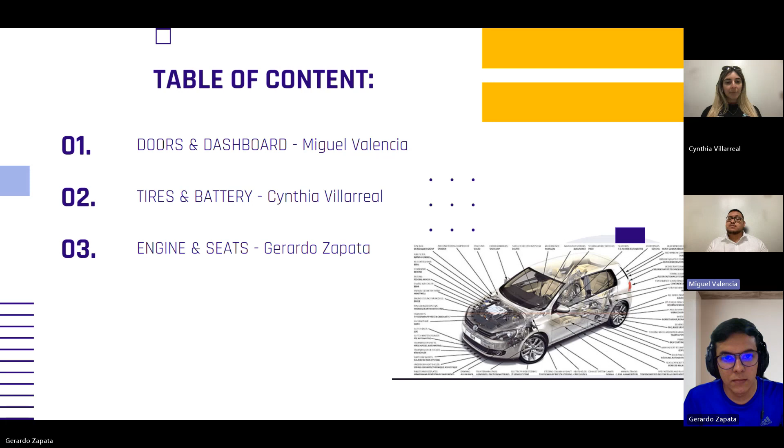So the doors. Car doors are crucial for safe and comfortable passenger access. They provide a secure barrier between the occupants and the outside environment, protecting them from weather, debris, and potential accidents. Additionally, the doors house essential features like window controls, speakers, and sometimes interior lighting, contributing to the overall functionality and enjoyment of the car.

So the current process for making the door for this particular car starts with stamping: large steel sheets are pressed into the desired door shape using high pressure dies. Then welding, for the steel panels, which are joined together using spot welding or laser welding for a stronger and more precise bond.

Now we come to the hinge and latch, which are mechanisms attached to facilitate the door opening and closing. And then at the end, we have the paint, which goes on the exterior, painted for aesthetics and also for corrosion protection.

So the materials used during this process: high strength steel is critical for reinforcement, basically in areas like the hinges and latches and points where additional strength is needed. Plastic ABS is used for the inner panel, and tempered glass is used for the window, which provides stronger glass and safety.

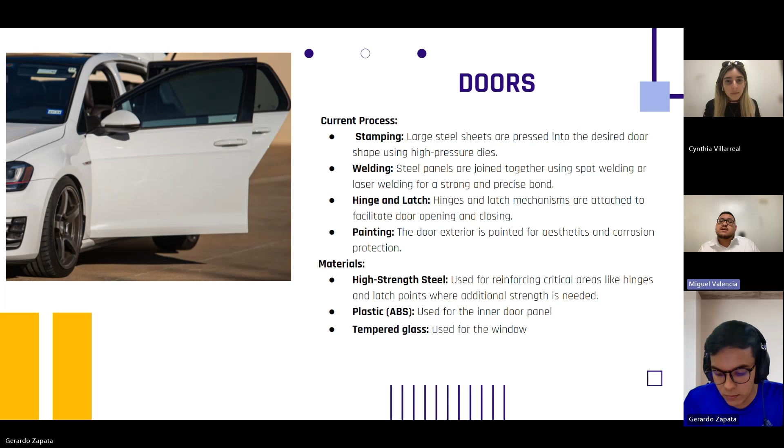So continuing here, my alternative way would be metal additive manufacturing. The material I would like to use for the alternative way would be recycled steel or aluminum powder. The process for this would be similar to 3D printing, but uses metal powder to build the door structure layer by layer using a laser or electron beam.

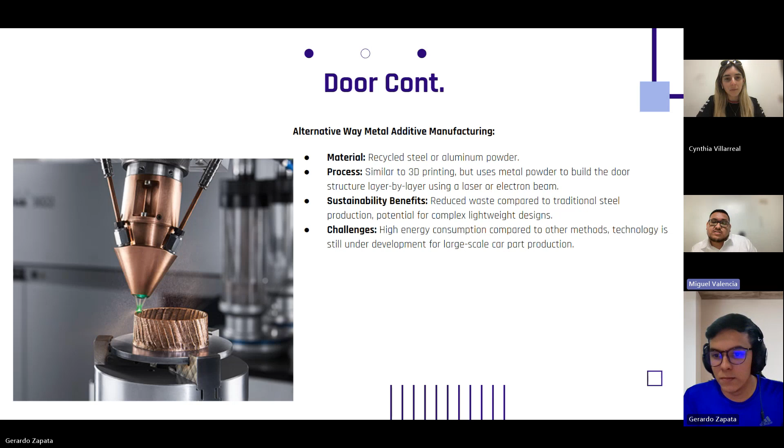So the sustainability benefits from this will be reduced waste compared to traditional steel production, and the potential for complex, lightweight design. Some challenges we can encounter during the alternative way are high energy consumption compared to other methods, and the technology is still under development for larger scale car parts production.

So my production plan for the alternative way will start with material selection. We will evaluate factors like weight savings, structural integrity, and environmental impact to choose the optimal material. For forming, we will utilize stamping or hydroforming techniques to shape the chosen material into the desired door form.

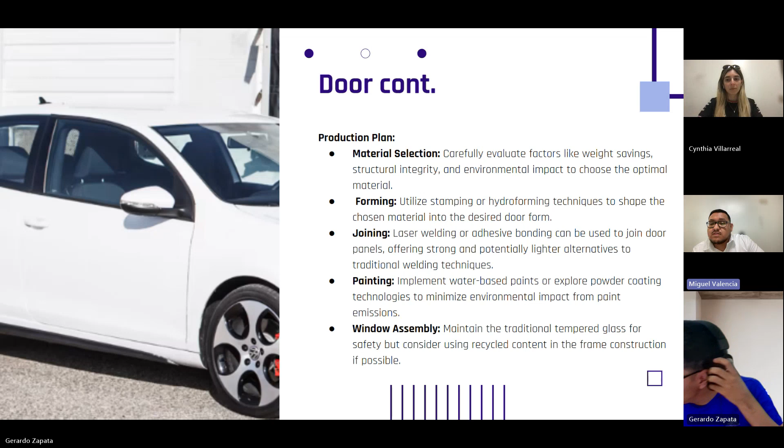For joining the door, we will use laser welding or adhesive bonding to join the door panels, offering a strong and potentially lighter alternative to traditional welding techniques. For paint, we will implement water-based or explore powder coating techniques to minimize environmental impact from paint emissions. For window assembly, we will maintain traditional tempered glass for safety, but consider using recycled content in the frame construction if possible.

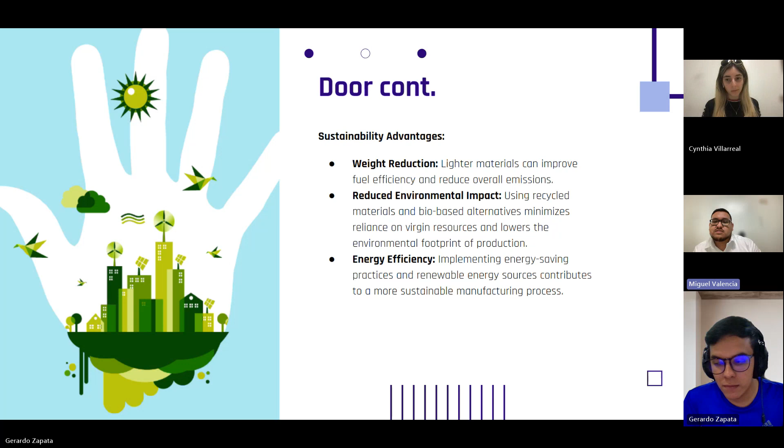So the sustainability advantages will be weight reduction: lighter material can improve fuel efficiency and reduce overall emissions. Reduced environmental impact: using recycled materials and bio-based alternatives minimizes reliance on virgin resources and lowers the environmental footprint of production. Energy efficiency: we will implement energy saving practices, and renewable energy sources contribute to a more sustainable manufacturing process.

Now to my next component, the dashboard. The current method of the manufacturing process for this will be mold design, where engineers create a detailed mold that replicates the desired dashboard shape and features.

It uses injection molding, so molten plastic is injected under high pressure into the mold cavity, filling the desired shape. Cooling and ejection: the plastic will cool and solidify within the mold, then the finished part is ejected. Now trimming and finishing: excess plastic is removed and the surface may be textured or painted for aesthetics.

So the main material used to make the dashboard is plastic, ABS, based on its strength, heat resistance, and also aesthetics.

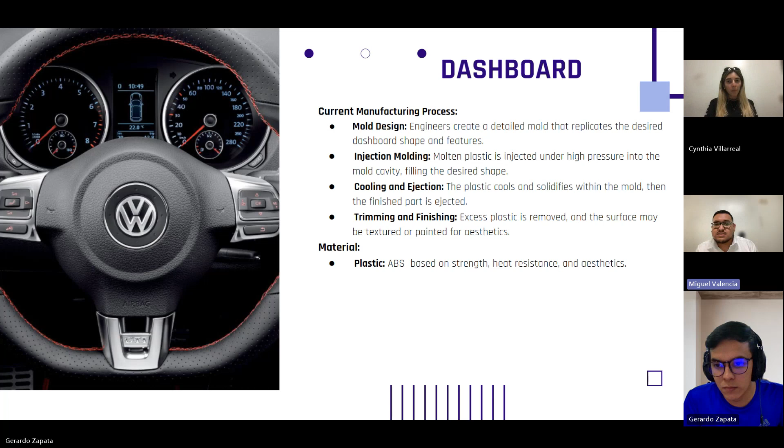So for an alternative way of making the dashboard, I went with 3D printing. The material would be recycled plastic filaments or bio-based composites. The process is that the dashboard is built layer by layer using 3D printing, allowing for customization and potentially complex lightweight designs.

Sustainability benefits from this would be reduced waste compared to traditional methods, potential for on-demand manufacturing, and reduction in transportation needs. Some challenges we could run into with this alternative is that 3D printing technology may be slow at the moment and expensive for high volume car production. Also, meeting strength and heat resistance requirements may be a challenge for future development.

So now my production plan will jump back into material selection. As I stated before, it will be plastic filaments or bio-based composites, chosen for lightweight, durability, cost, and environmental impact.

For molding technology, utilizing efficient injection molding techniques to minimize energy consumption. Natural dyes and finishes would replace traditional chemical dyes with natural alternatives for a more sustainable approach. And then recycled content integration: develop a process to incorporate a significant percentage of recycled plastic content into the dashboard.

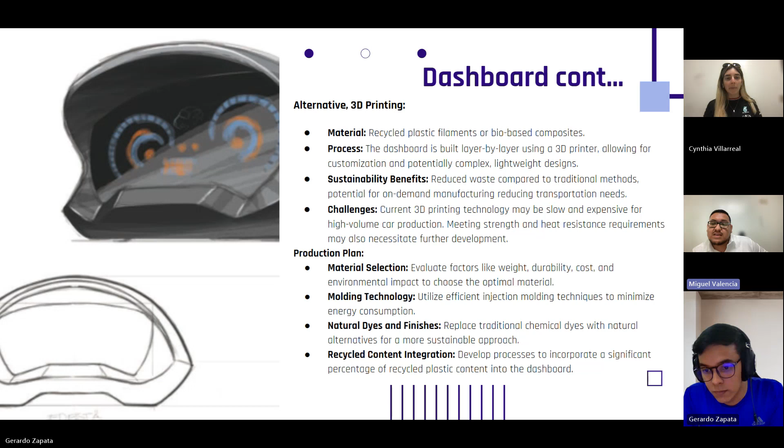So now the sustainability of this will reduce reliance on raw material. Bio-based plastics and recycled content will minimize environmental impact from resource extraction and lower the carbon footprint. Bio-based plastic and energy efficient production processes contribute to a more sustainable manufacturing approach and improve recyclability.

Natural fiber composites and an easily disassembled design potentially enhance the dashboard's recyclability at the end of its lifespan.

For my component, tires: the rubber parts of a tire surround the rim of a wheel to form the outside of a car's wheel. In addition to providing traction, they also sustain the weight of the vehicle, cushion impacts from the road, and preserve directional control, among other vital duties.

For the material, rubber: the two main types of rubber used in tire manufacture are natural rubber and synthetic rubber. Rubber offers grip, durability, and flexibility.

For steel, tires frequently use steel belts to strengthen the tread area and increase stability. The tire is fastened to the wheel rim using steel bead wires.

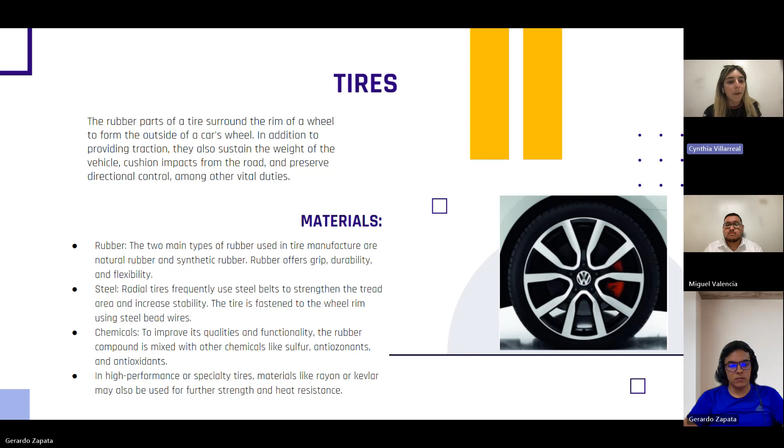For the chemicals, it's to improve quality and functionality. The rubber compound is mixed with other chemicals like sulfur and antioxidants. For high performance tires, materials like rayon or Kevlar may also be used for further strength and heat resistance.

For continuation in sustainability, the environmental effects of using non-renewable resources, including components derived from petroleum, and disposing of tires at the end of their life cycle, are two major obstacles in the tire production process.

One of the sustainability production plans involves natural rubber, reducing reliance on petroleum-derived synthetic rubber. This can be achieved by increasing the usage of natural rubber obtained from sustainable rubber plantations.

We also have recycled materials, which can lower waste and the need for virgin materials in tire manufacture. One example of such materials is recycled rubber from old tires or other sources.

We also have biodegradable materials: at the end of the tire's life cycle, the environmental impact can be decreased by creating tires containing biodegradable components. And we also have renewable energy; using renewable energy sources such as solar or wind power in tire manufacturing facilities can reduce greenhouse gas emissions.

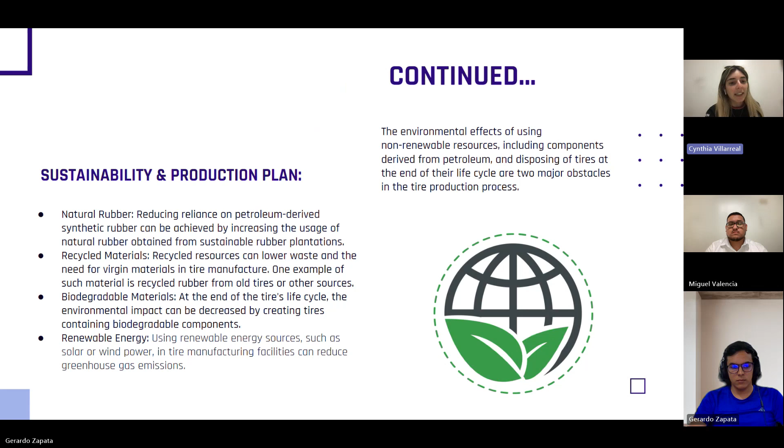My second component is the battery. A car battery is a type of rechargeable battery that powers the engine and other electrical systems of the automobile when the engine is not running.

Some of the materials include the outer casing, typically polypropylene, a strong, resilient polymer that can survive the extreme conditions of an engine and is used to make the exterior casing of automotive batteries.

We also have a set of lead plates, referred to as cell plates, which are housed inside the battery and covered in two layers: a negative plate made of sponge lead and a positive plate made of lead dioxide paste.

These plates are submerged in an electrolyte solution, typically a water-diluted sulfuric acid solution. We also have the separator to stop short circuits and allow ions to pass between the plates. Thin porous separators composed of materials like rubber or polyethylene are positioned between the positive and negative plates. Last, we have the electrolyte, a solution that facilitates the chemical reactions that produce electrical energy by allowing ions to move between the positive and negative plates.

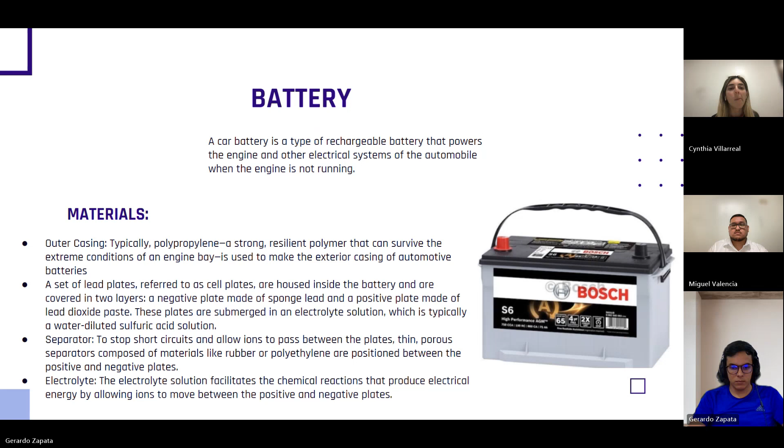For sustainability, the goals in automotive batteries are to minimize the negative effects of battery manufacture on the environment, extend battery life, and enhance the battery's ability to be recycled at the end of its useful life.

For the sustainability and production plan, alternative battery chemistries investigate different battery chemistries that use more environmentally friendly materials and may have longer lifespans and higher energy densities, including solid state batteries.

We also have manufacturing processes which minimize the negative effect of battery manufacture on the environment by implementing sustainable manufacturing techniques, such as employing renewable energy sources and utilizing less water and chemicals.

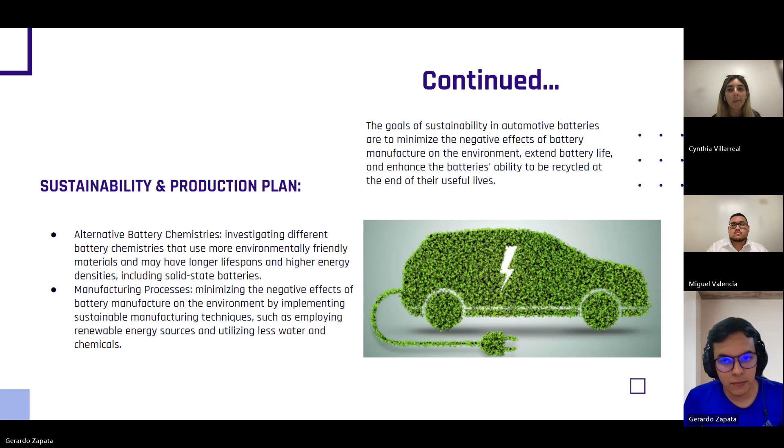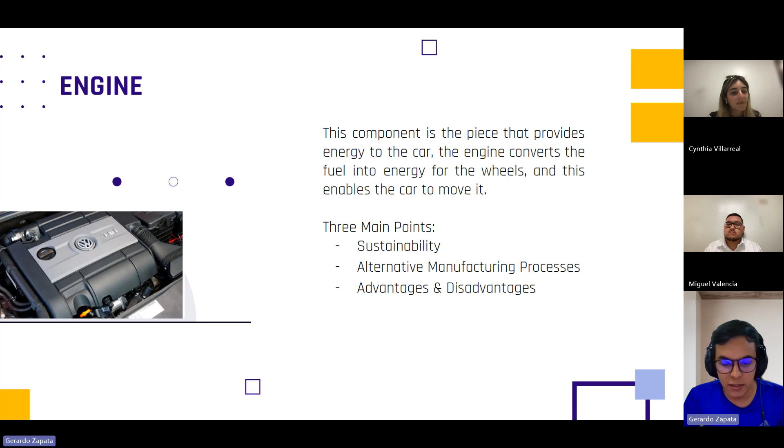Now I'm going to talk about the engine. This component is the piece that provides energy to the car. The engine converts fuel into energy for the wheels, and this enables the car to move. In this topic I'm going to talk about three main points: sustainability, alternative manufacturing processes, and the advantages and disadvantages of the alternative manufacturing processes.

First, sustainability. Internal combustion engines face the constant challenge of improving efficiency and reducing emissions in response to environmental concerns and regulatory requirements, which is why manufacturers are exploring alternative fuels such as electricity or even water.

In the alternative manufacturing processes, materials like carbon fiber reinforced polymers or glass fiber reinforced polymers can be used. These will reduce the weight but keep the same strength and durability as when using an aluminum alloy.

Also, in the alternative manufacturing processes, we can use some polymers that are very different. Other materials could be titanium alloys, which are lightweight and have excellent corrosion resistance.

But the problem with these materials, in terms of advantage and disadvantage, is the price—it's really high. For example, the advantages could be weight reduction for the car, innovative designs, or environmental benefits. But the disadvantage could be the cost of production, because the cost could increase by 10 or 50% by only changing one material.

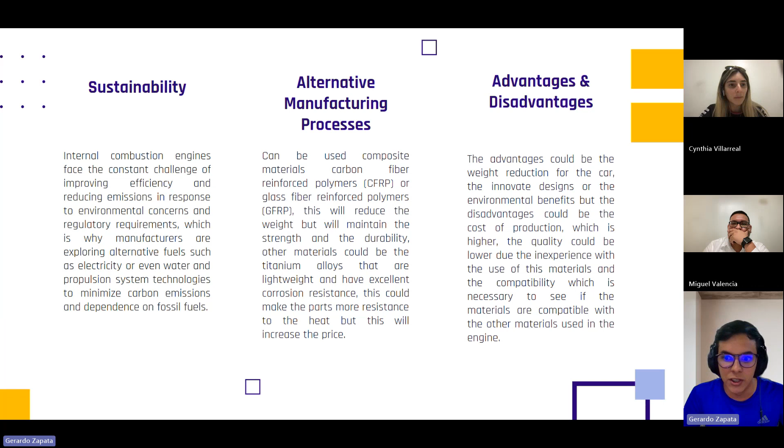The seats are the component of the car which provides comfortability to the user. This is the place where the user spends the most time when driving, so of course this place should be comfortable for the user.

These three materials are the main materials used for the seats. The first one is leather, which is used in premium versions of a car or as part of an optional package.

The second one is synthetic leather, also known as eco leather. This material is a popular alternative to genuine leather, but it's easier to clean and easier to maintain in good condition. The last one is Alcantara, which is a synthetic material with a luxurious texture, similar to suede.

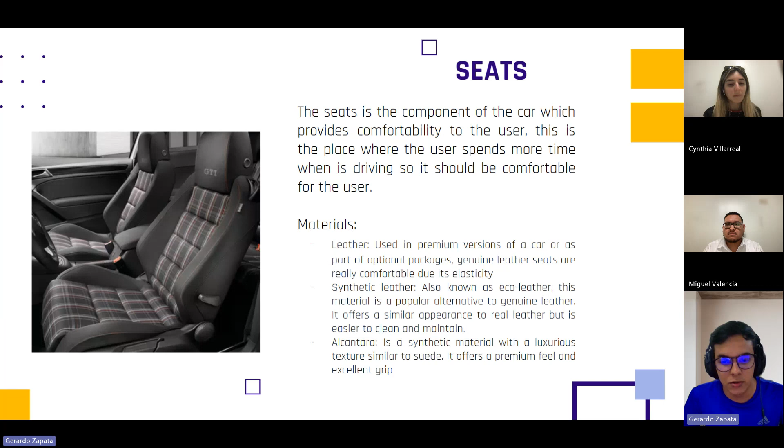Now I'm going to talk about the sustainability and alternative process. First, sustainability of the seats has become paramount in automotive manufacturing, not only for reasons of environmental care, but also to satisfy consumer demands for ecological products, because this will increase the price and could increase the market of the car.

To satisfy this market, manufacturers are prioritizing the selection of sustainable materials such as recycled fabrics and low-impact leather alternatives. This also reduces the waste used in the fabrication of a car seat.

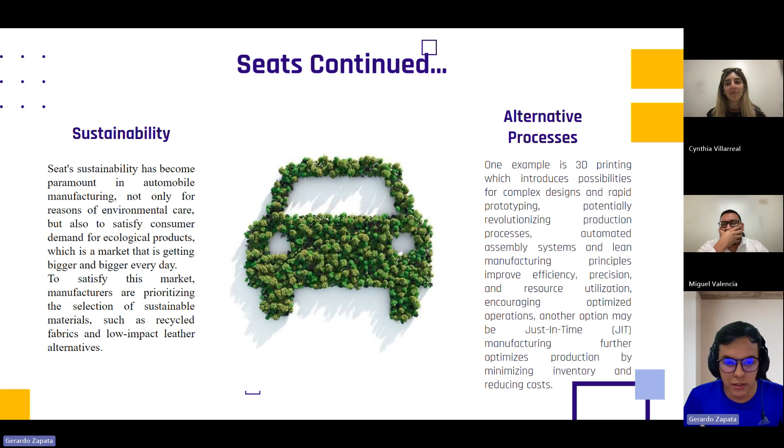Now, in the alternative process, one example could be 3D printing, which introduces possibilities for complex designs and rapid prototyping, potentially revolutionizing the production processes. Automated assembly systems and lean manufacturing principles improve efficiency, precision, and resource utilization, encouraging the optimization of operations, also reducing waste in production.